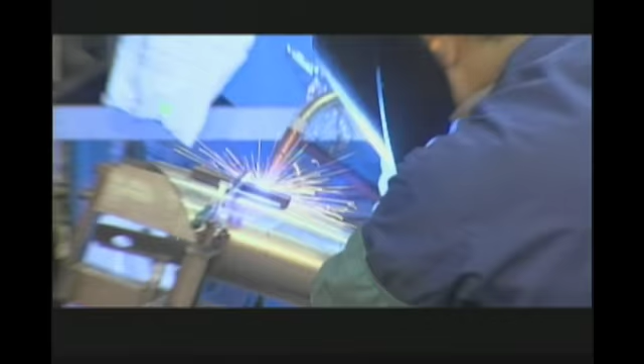So today I'm going to talk to John Potts at Vance Hines to see exactly what it takes to go into engineering a pipe the right way. So John, where does it all start? Well, it all starts basically with a concept, with an idea.

Yeah, I see that over here. You have like a little drawing. And I know we've talked about your big radius pipe before, but this is how it started, huh? On just a drawing pad. Yeah, basically, our big radius 2-in-1 started out as a sketch.

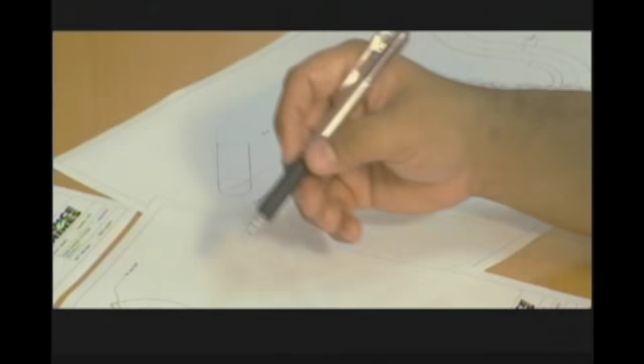Okay, so a designer lays this out. It goes through some, I'm sure, huge approval process. Oh, definitely. Okay, and then where does it go from there? Then it goes to CAD, computer-aided design. Determine if it's something that can actually fit a motorcycle, if it's something that can be manufactured. So there's hours and hours of planning just to determine whether or not we can actually make it.

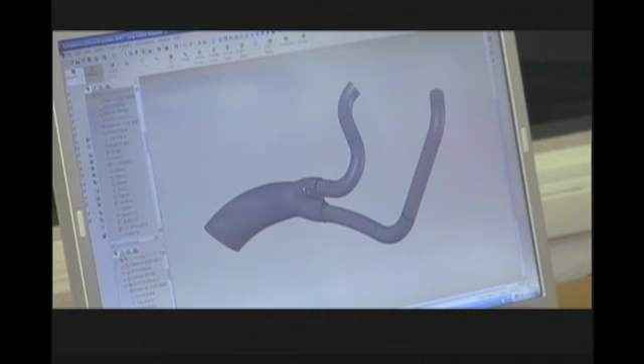Right, so unlike sometimes a custom set of pipes, you have to make sure that these pipes are going to be able to bolt on for your customer and give them the quality and performance they want. Right, and it's something that you can repeat, something that you can manufacture over and over again. Good point. So we go from the sketch here to CAD. Directly to the computer, and that's where he engineers it.

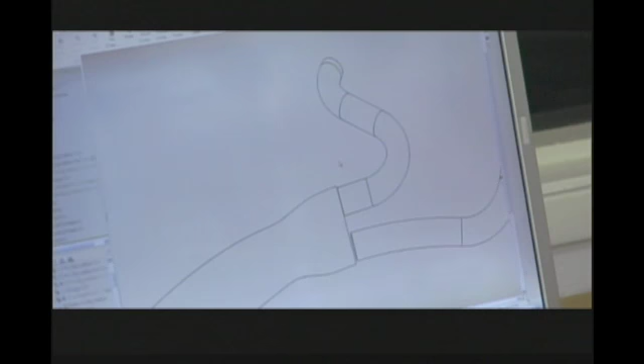So John, exactly what are we looking at here on the monitor? What we're looking at is a CAD rendering of our new big radius 2-in-1. We've got the head pipes, we've got the muffler body, and the heat shields all rendered up in 3D. We've got to go through and estimate all the curves, put in the diameter of pipes that we have available in order to do the CAD drawings, and then that really helps you figure out how the pipes can actually perform in the real world.

Then we actually make it look like it's a chrome piece as well. That looks beautiful. It's what made us decide to make the pipe. So what happens after we see it on the screen and it looks beautiful and it's shiny and everyone approves it? Then we take that computer-rendered file and actually print it up on an ABS plastic machine.

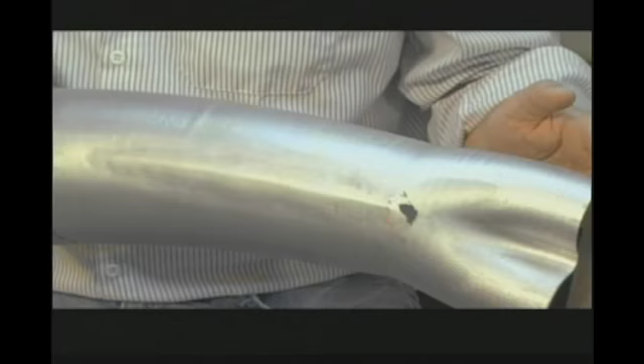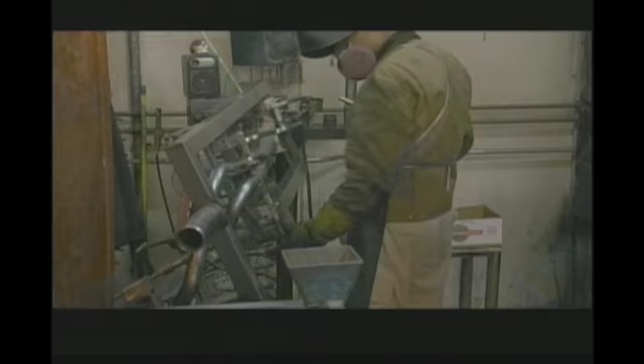And that's what this is right here, huh? Yeah, it's a prototype. Wow, so we have a sketch, some blueprints, CAD, then we do a little bit of plastic work to this, and that's when we get to go outside and play with the tools, huh? Yeah, that's when we grab our safety glasses and actually go make a pipe.

All right, so let's head out to the workshop, to the facility, and see exactly what it takes to go into every stage in making the big radius pipe.

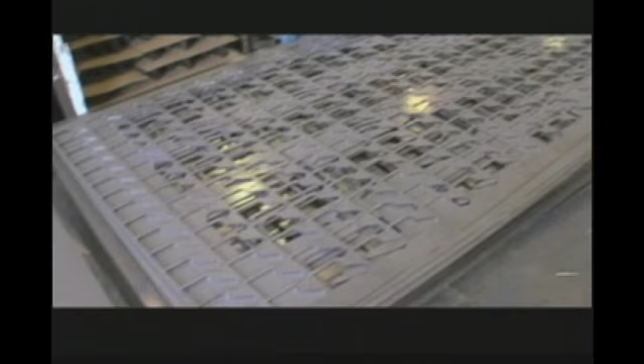All right, John, so tell me, what are we standing on here? Jay, we're standing on our raw product. This is pretty cool because basically a Vance Hines pipe doesn't start as a tube. It starts as a flat piece of sheet metal.

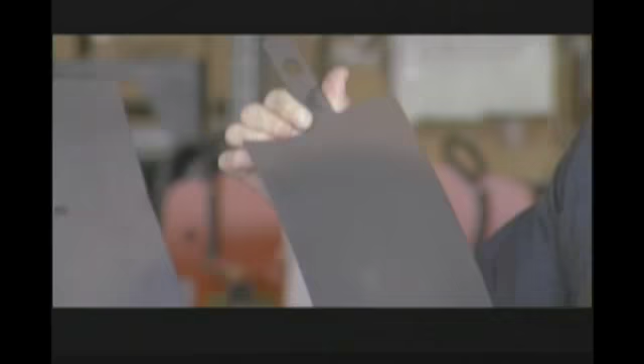Then what happened? This blank sheet goes into our laser cutter, and it cuts out the heat shields, the muffler body, everything. So we have a blank piece of sheet metal, cuts it out into this shape, and then this will get pressed and turned into a pipe somehow, right?

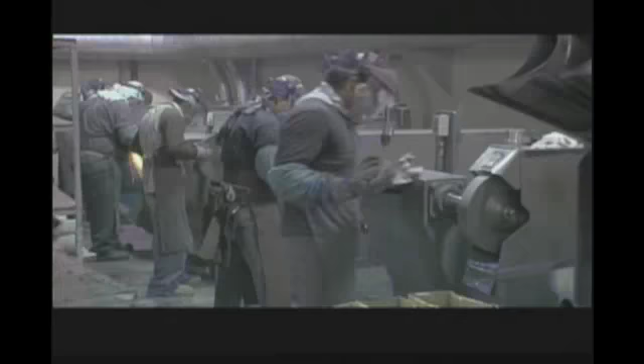Pressed, formed, recut, welded, you name it. So there's a little more engineering than just running across the street to the muffler shop, grabbing some tubing and bending it, huh? Yeah, there's no way you can just grab a piece of pipe and make this exhaust system.

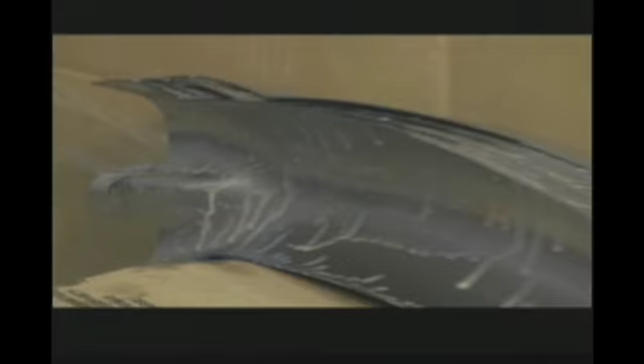So John, this is the next step of the process, and here's that blank piece of metal that we saw cut on the laser. What happens here? Well, basically the heat shield's just been cut out of the laser, and now we're going to form it into a heat shield. We've got two steps of forming here. First, it's going to be pressed down into the general form of the heat shield. Then we're going to apply the radius.

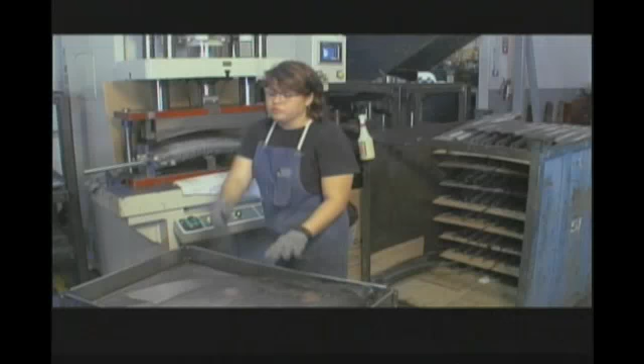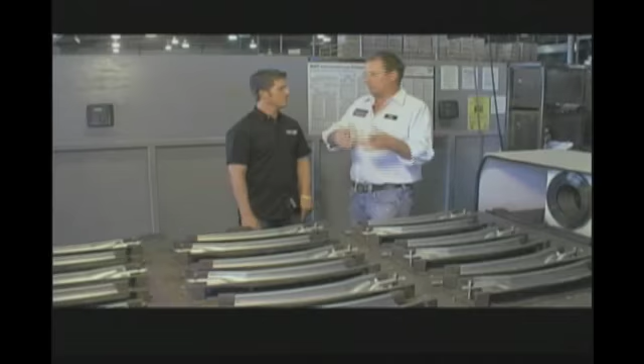So John, we're back from forming. We saw it get formed, and we're back at the laser again. What happens here? Well, basically, the product's got to come back to the laser to get the excess trimmed off. All right, so let's see how this works.

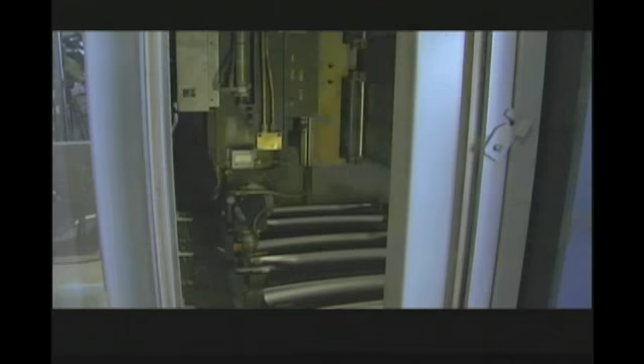So now we're basically watching the laser and the conveyor move back and forth to trim off the excess so that this product can be brought into welding and all put together.

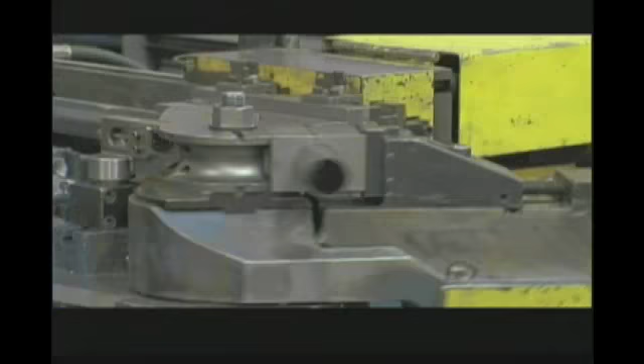We'll bend some pipe, do some welding, and assemble the finished product next on American Thunder, so don't go away.

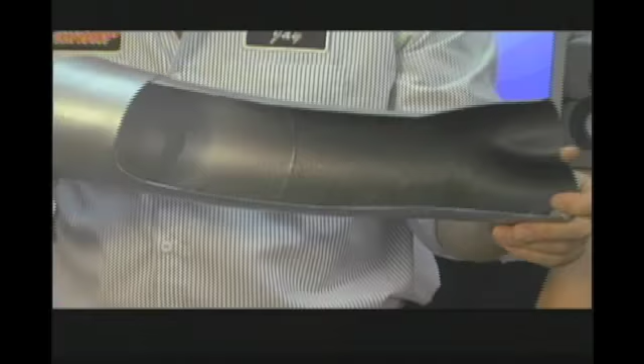At Vance Hines, pipes are computer rendered from a sketch, and after a plastic prototype is made, a laser cuts the shape needed from a flat sheet of metal. Next, the tubing is bent to the exact specification.

So John, now I recognize this. This is what standard pipe tubing looks like, and what do we do with this? That becomes our head pipe, Jay. So all we do is just bend it up, and it becomes a head pipe. It's done, simple stuff. Very simple. It's the only simple thing in this entire process, I think. Pretty much.

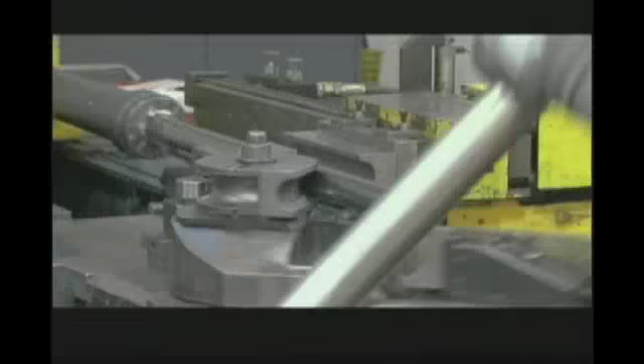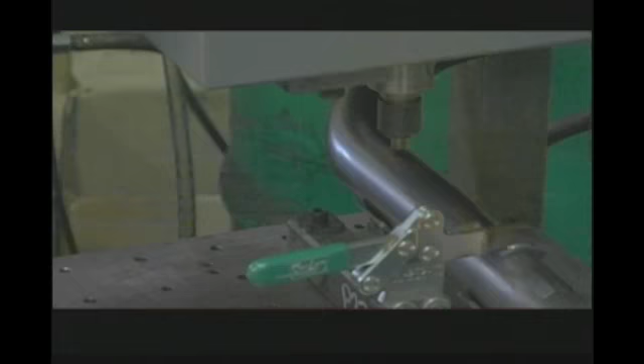So John, now that the pipes are all bent up, and you have the collar pressed on, what happens here? Well, on this particular collar, we have to weld it on so it doesn't fall off. Then we've got to cut an O2 sensor bung into the head pipe as well. That's kind of tricky, isn't it? It is tricky because it's an oval-shaped hole on a curve, so we actually had to invent our own machine to do it. It's very cool.

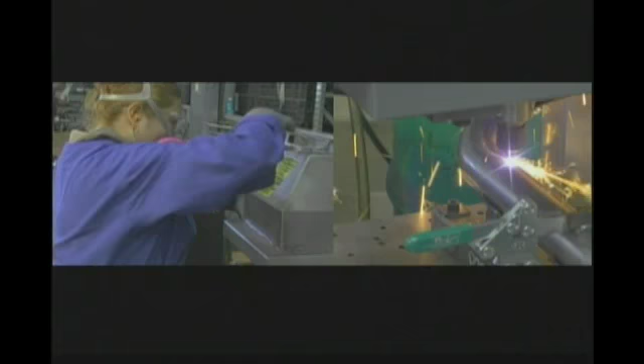So this is actually finished, but we didn't even see that third radius be shaped. Yeah, there's actually a third forming process that we didn't go through. John, this is a lot of work to make a pipe. Jay, we haven't even gotten to welding. Wait till you see the steps involved to weld this pipe. Let's go see some sparks.

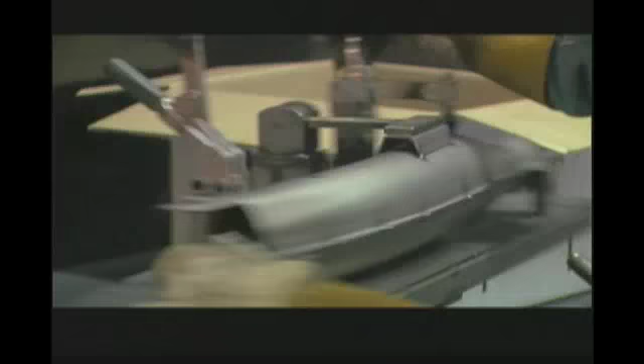We've tacked it, we've seamed it, put in the end cap. Now what? Now we've got to put in heat shield clips. Now we'll bolt right over the muffler and look beautiful, huh? Yeah, that'll be the beautiful chrome heat shield that everybody knows.

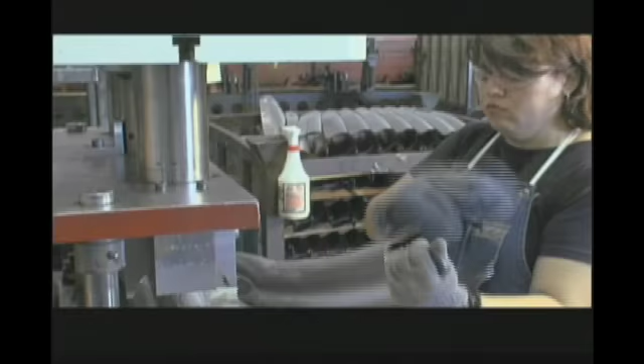So John, this looks like the finished heat shield just about. We just saw the heat shield clips put in. It's been tacked and seamed, end cap. All we have to do is... just got to go to the shear shop and get cut up a little bit. All right, well, this is all it takes just to get a heat shield done. So if you think you can do these in your own garage, it's not gonna happen. There's a lot of engineering and a lot of process, and we haven't even gotten to the exhaust system yet. Let's go take a look at the rest of the process and keep going, baby.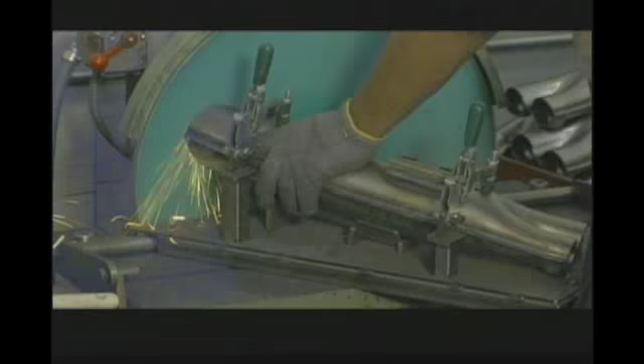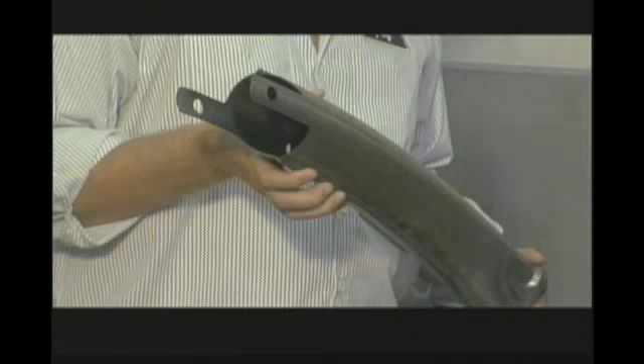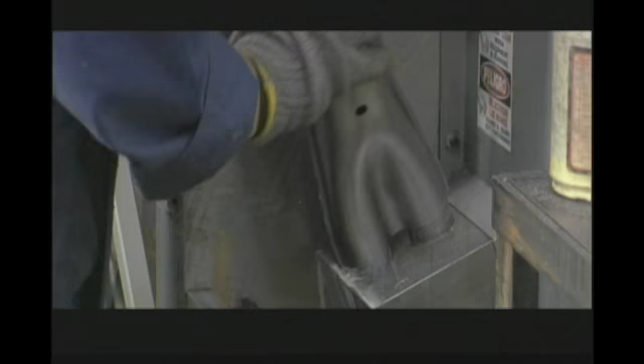I see that this is the muffler body that we looked at before, and now it's been all welded together. And what happens next? Now we've basically got to clean it up and make sure it fits for production. So we've got to cut off the tabs, deburr it, and make sure it's perfectly round, because when it goes through all this process, it could lose some of its shape. Exactly, so in order to make the baffle fit perfectly, you have to reform this and make it round.

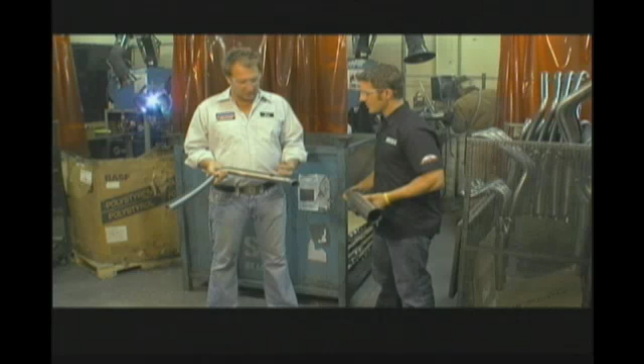So John, this is something that looks like a pipe. The hole is cut here for the O2 sensor. It gets welded in. Now what happens at this stage? Now we take those head pipes and attach them to the muffler body. So this is really where the pipe becomes a true exhaust system.

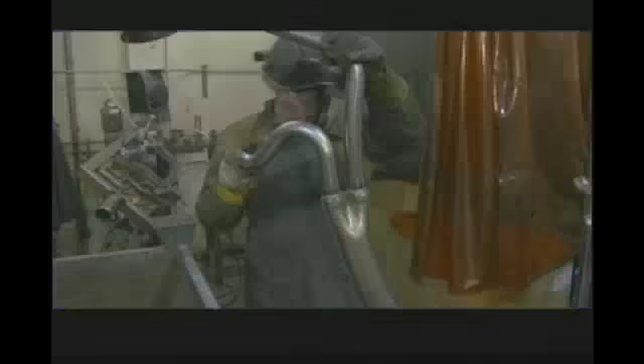Well, this was our heat shield that we started off with early on, and it looks pretty good to me. Not quite. We've still got to polish out all the imperfections out of the metal so it'll be ready for chrome. Then packed up and they're ready to go, huh? Put in a box and shipped out to your customer.

John, I can't believe it. Today this started off on just a piece of paper and we went through the process and this looks amazing. The heat shields came out beautiful, the header pipes, the welds. I mean, it really came together, and the heat shield for the muffler, it's like a piece of art.

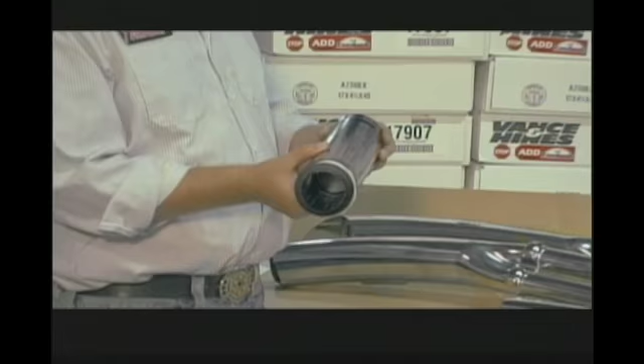John, one of the things we didn't get into too much today was the baffle, and I know the baffle is an intricate part of an exhaust system. This is really what creates the horsepower, the mid-range, the sound, and kind of everything else that helps a performance pipe be a performance pipe. Yeah, this baffle is equally as complicated to make as the rest of the exhaust system we saw today.

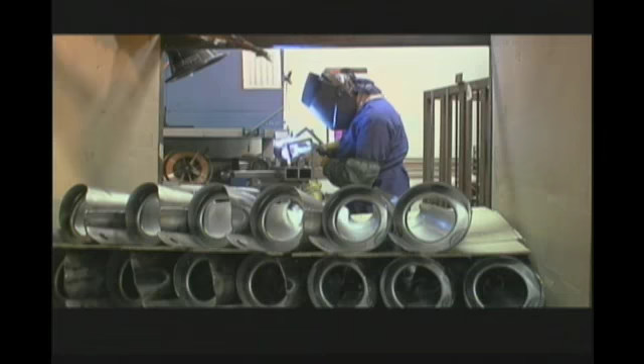Well, it's pretty obvious from all the white boxes with Vance Hines stamped on them here that you guys certainly offer a lot of product. And you know, it was great to see how these pipes were made. I really appreciate them so much more coming down and actually seeing the process. So in short, no, you really can't make a proper exhaust system for your motorcycle in your own shop. John, thank you very much. No problem, all right, I'll talk to you soon.